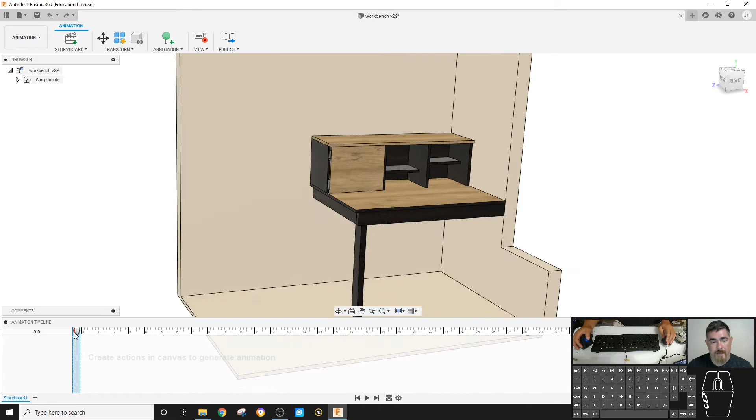So down here we have the timeline and some storyboards. You can make multiple storyboards if you wanted to do different things. I'm going to start here. Notice my cursor, the timeline is at zero, meaning I can move around wherever I want and it's not going to record it. If I move this timeline out, and then change something, it's automatically going to record that difference. So now if I come back, you can see it's making that change from where I started to where I am now. If I delete that, it goes back.

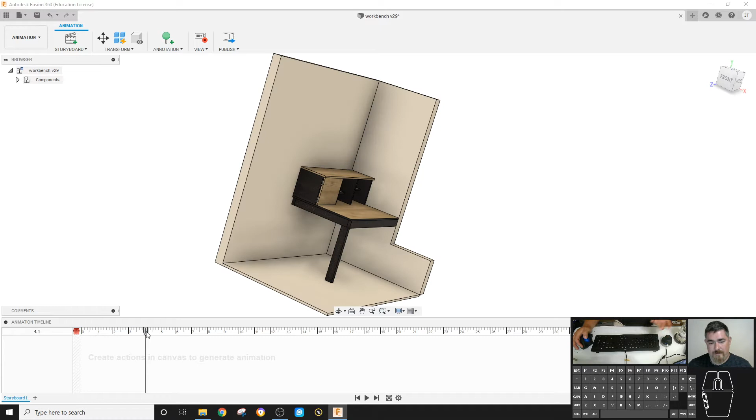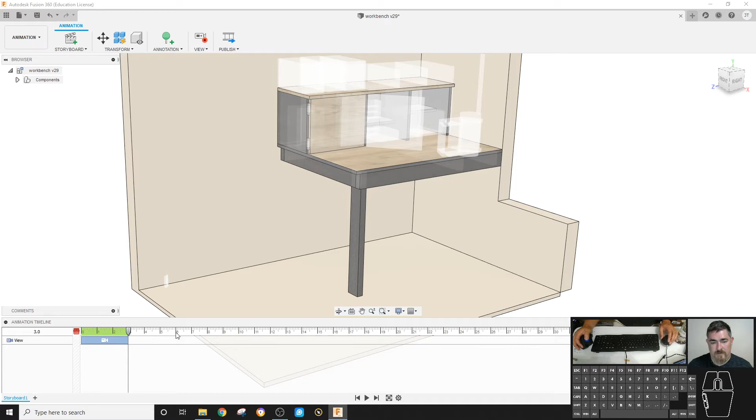So I position it how I want it to be when I start. Maybe I want to zoom out. I'll start here, and tell it in 3 seconds I want it to be there. Now when I play it, hitting the little play button, I can see it pulls out. Cool. Then maybe in another 3 seconds I want it to spin around here, come up a little bit. Hit play, and it goes out to there, then spins around.

It doesn't track how you move in between the points. It just cares that at the end of that time, you're at that spot.

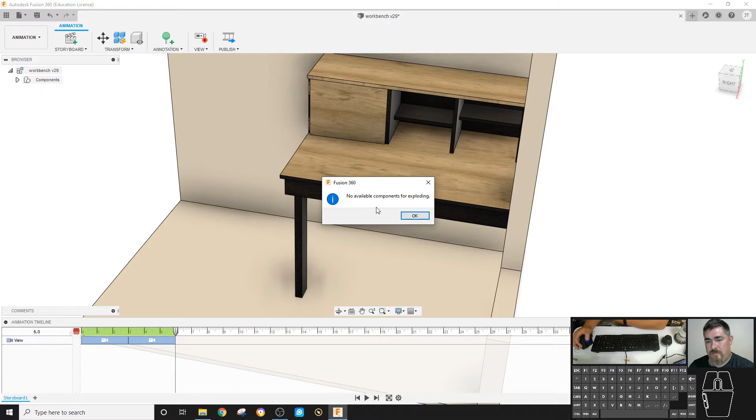All right, so I've got that. If I go in here, I've got some options. I can auto explode things. So if I tell it to auto explode all levels, pick that first, you can see it popped all the different components away from each other. I can change how much, but I don't have any control over how those are doing things, so it's not really helping that much.

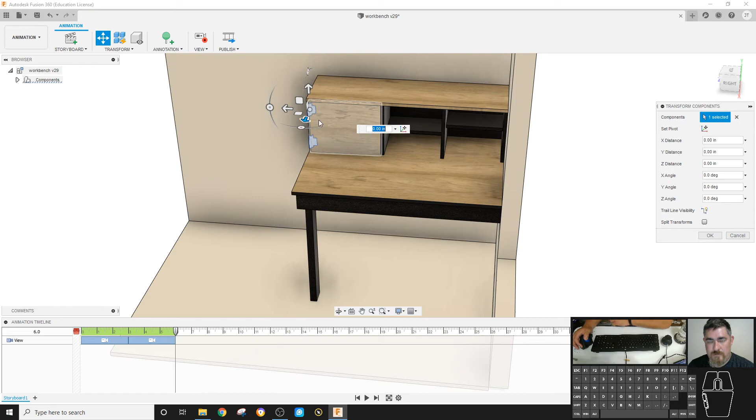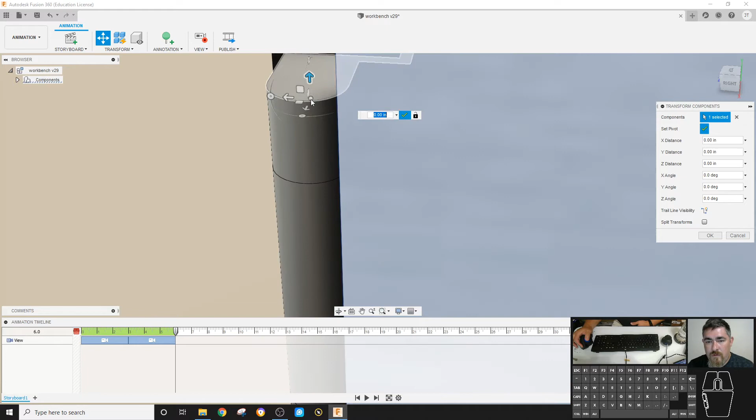So I could do a move instead. Maybe here I want to move that door and those components over here. Actually, I'm just going to make that door open, so I'll do a move, pick the door, and set the pivot point as the center of there, and have that rotate out.

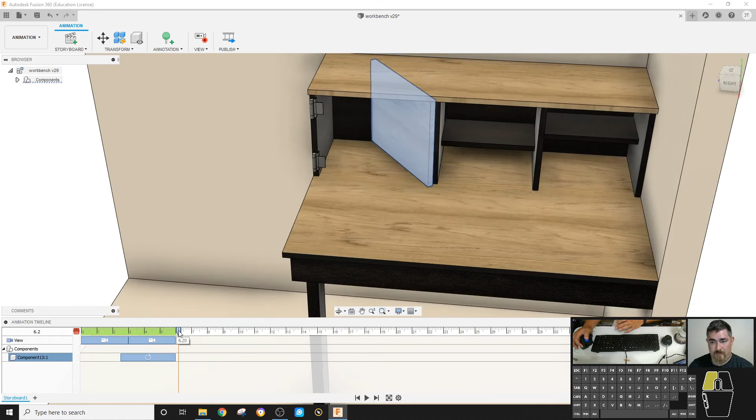Turn off set pivot, rotate that out, not enough so I can see the hinge, because I don't want to see that. And you can see here it's showing that it's doing that, and I don't want that move, I just want it to pivot. Oh, eek. That looks bad, because it's not doing what I want exactly. So I'm just not going to do that.

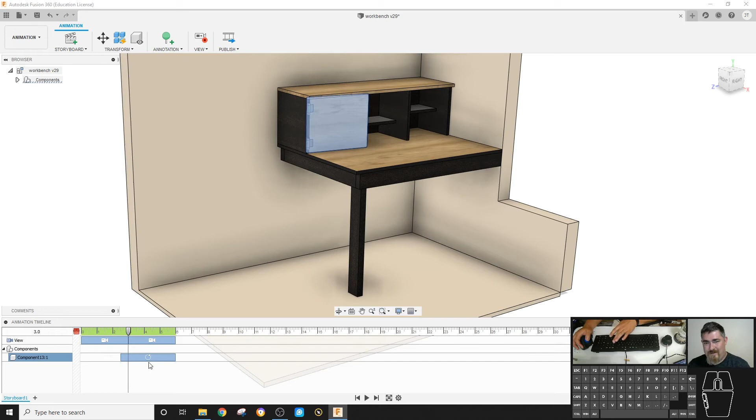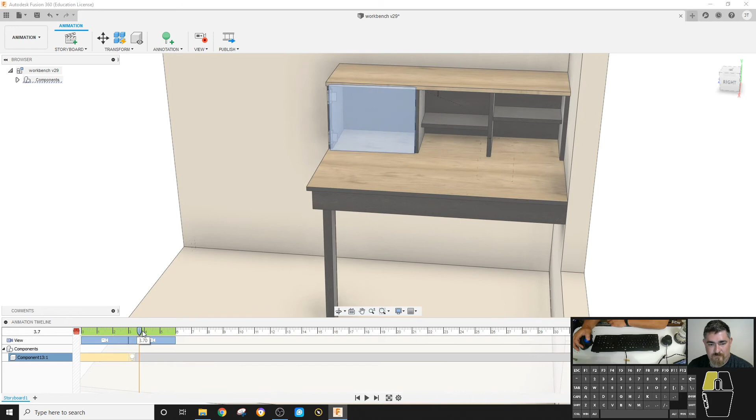Instead of having it pivot, I'm just going to have it fade away. So I'll pick on that and pick show hide, and have it come through. As I come out, I can see it, and then it'll go off at that point. I can do it instant, or over a duration. So now it'll fade out. Maybe I can do that, and I'll leave those hinges there.

So, all right. Oops, uh-oh, I moved that, now it's moved, so I can re-stretch that time. If you go to the end of a time block, you can move it and it's going to re-record that location. So I can go through and do that.

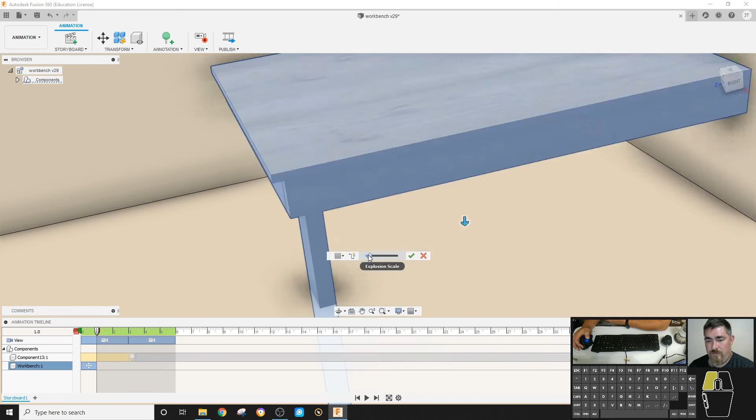You can do a manual explode. I can tell which direction I want that component to go and then how far. You can do the same thing with the move. We can also change the appearance of something.

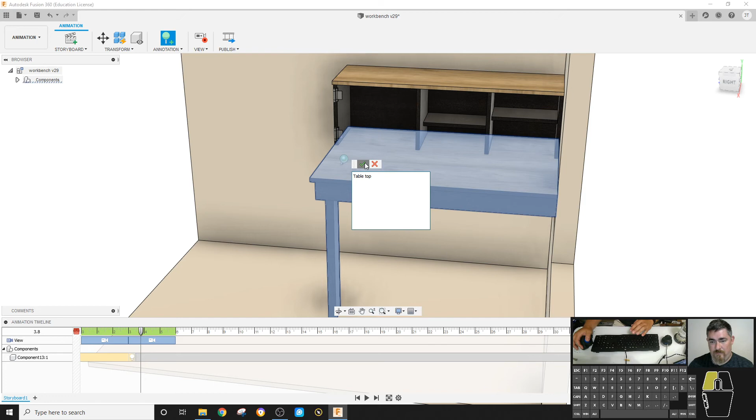You can also come up and add an annotation callout. So I can create a callout, pop that there, and say tabletop. Now it comes out and pops up there as the push pin in the video. So as you're talking about it, the little push pin pops up, but you don't see the annotation itself in the video, it just turns on at that point.

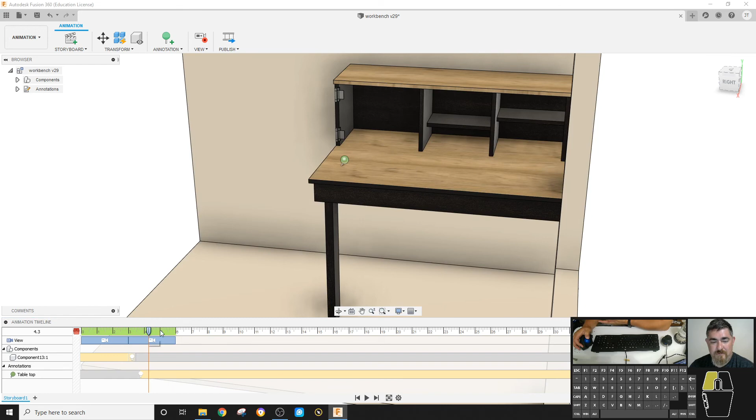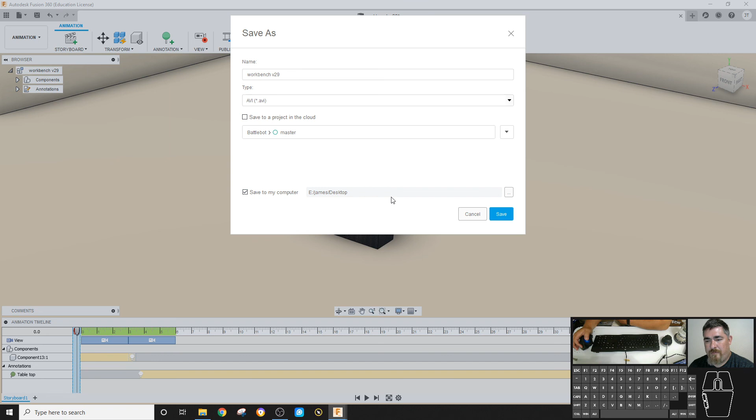So I can make this video here, and when I get done, I can hit publish. I'll tell it either all storyboards or just the current one, whatever size, hit OK. Now it's going to ask where I want to put this. I'll just throw it on my desktop, and call it workbench, type AVI. If I do this, it'll save the video in the cloud, or down here is where it saves into my computer. I'll do that one, hit save, and it's going to record this. And there's the video - I click on it and there's my little animation of it.